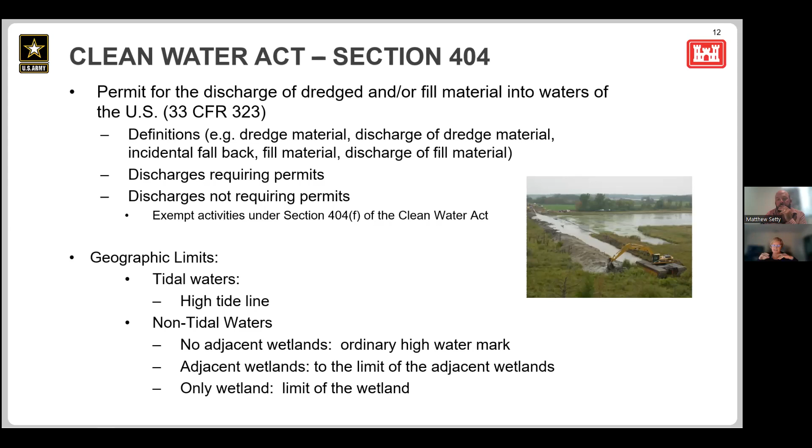When those proposed activities are, say, within the ordinary high water mark, that is the Section 404 jurisdictional line. Somebody had mentioned that distinction — 401 top of bank — which I didn't realize, so I'm glad to learn that, top of bank. We're going to be further down at the ordinary high water mark, which sort of aligns to maybe the 2 to 3 year flood — so not high floods, but not the summer trickle either.

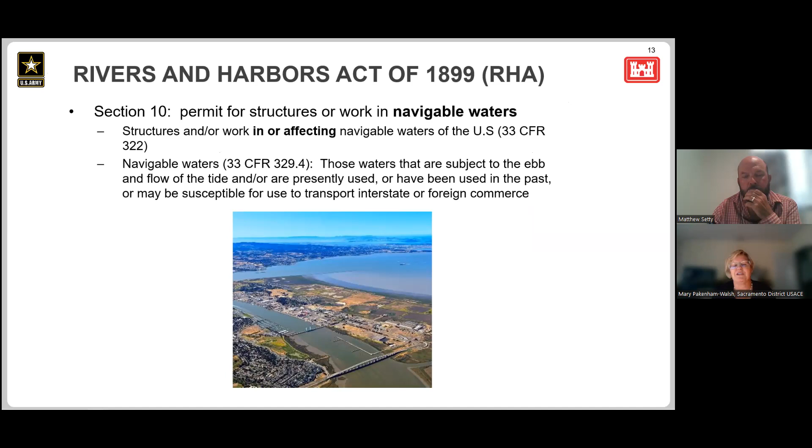I wanted to just mention Section 10 in case you do have work in, say, tidally influenced rivers or sloughs. There are some differences between Section 10 and Section 404 — Section 10 does not actually have exemptions. So I would advise if you're going to be in tidal waters at all, that you maybe give us a holler. I don't want to spend more time on it here other than to mention that, because I'm not sure how big of a deal it is.

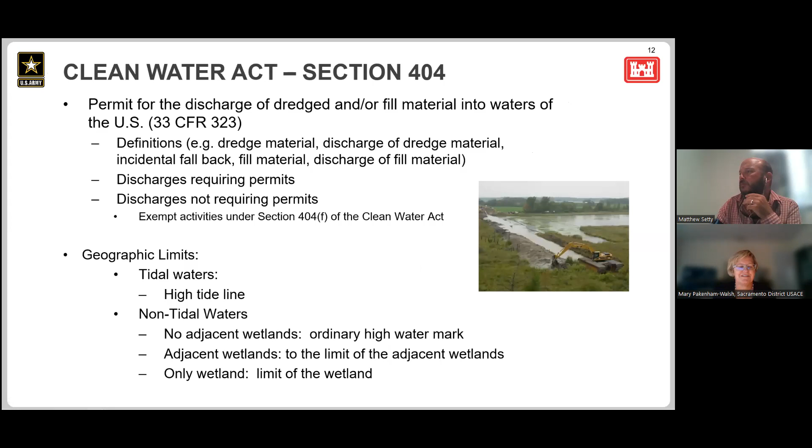Oh, we're going backwards. Okay, so trying to roll up — just a couple more slides here. Rolling up what I've been talking about: well, the first question, if you're looking at a fuels reduction site, is are there any waters of the U.S.? Some of you might know that there's a brand new revised definition of waters of the U.S., so we're trying to figure that out right now.

But say you've got a perennial creek — well, that's going to be a more obvious case. Point number 2 is speaking to the Section 10 I just mentioned. If you have, say, we'll use a creek as an example — would the activity actually result in a discharge of dredged or fill material? I'll provide some examples here shortly. And then the fourth point is, even if it would result in a discharge, is there an exemption? I'm going to also mention the exemptions that we have.

Okay, so these are the main buckets of reasons when no permit is required under section 404. There's a series of exemptions, which I'll list in one of the next slides. They're under section 404F, so you'll hear people trying to be fancy with their language saying it's a section 404F exemption, but there are several of them.

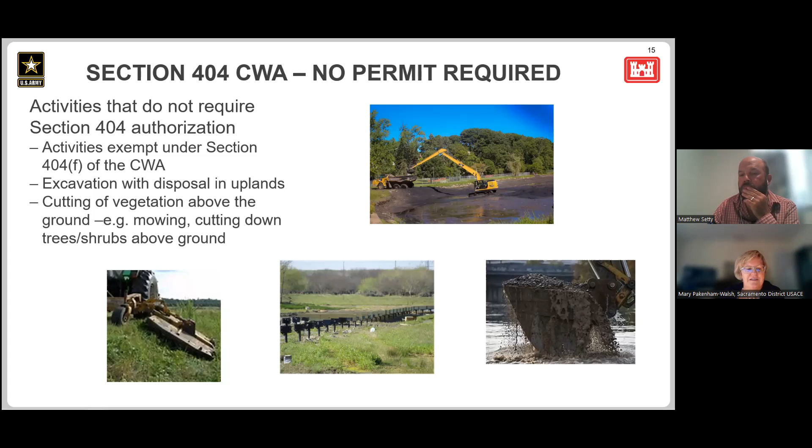Next slide, please, almost done here. So again, this is a takeaway, just so you have a list. But there are several exemptions that have been in the Clean Water Act since it came to be in the early 1970s.

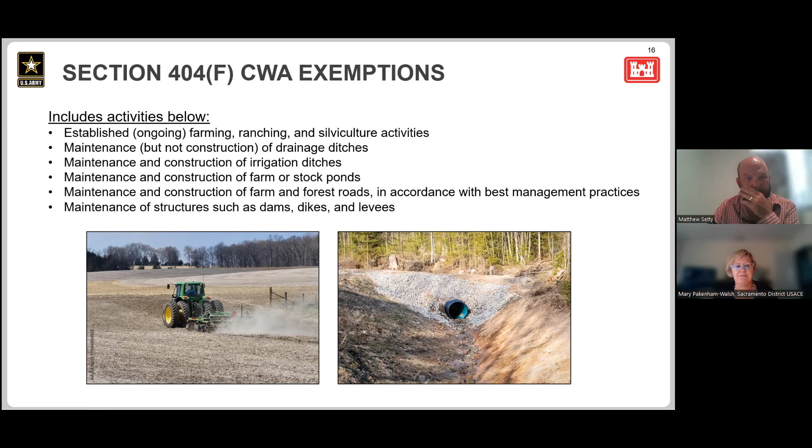A couple that might be of particular interest to this group are the maintenance of drainage ditches. In short, that provides for clearing out ditches—not natural creeks—of stuff that's accumulated, to bring it back down to its design grade. That's an exempt activity under section 404. There's also a whole series of agricultural related exemptions, so if you're dealing with an agricultural setting, those exemptions may apply.

Okay, so as Erin said, if possible, to achieve the objectives you need for public safety with fuels reduction, it's best to do that work in a way that keeps you out of the gray areas of whether you need a permit. That's a best case scenario—you go ahead and get whatever entitlements you may need, and don't have to deal with the water agencies. So where you might start getting into that gray area with our regulations is...

And then, as I mentioned before, if you take excavated material and plop it next door in a wetland, you're actually discharging fill into a wetland. So that's just about taking care of your excavated material—put it in an upland site.

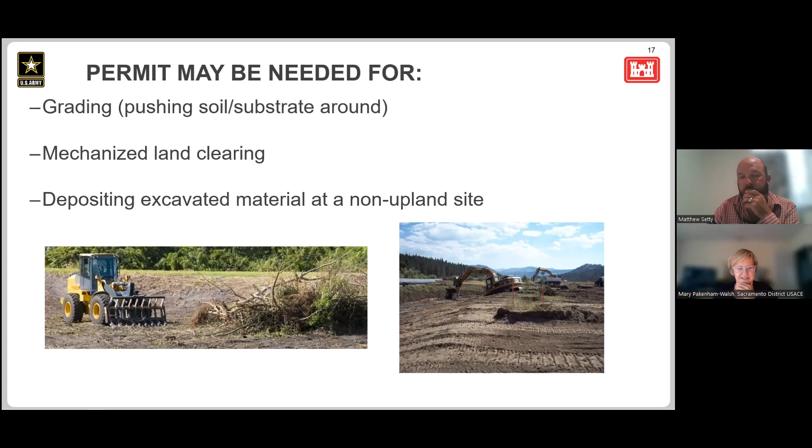But in terms of a summary: please mow and trim above ground to your heart's content. And upon hearing some of the other questions, even cleanly removing items—if you're not going into full-out mechanized land clearing, removing something like a tree that's fallen across a creek might not even touch our jurisdiction if it's fallen from one bank onto the next. Putting mats down, like for equipment, is not typically considered fill for us, if you're there during a squishy, wet time of year. So again, clean excavation and 404 exemptions.